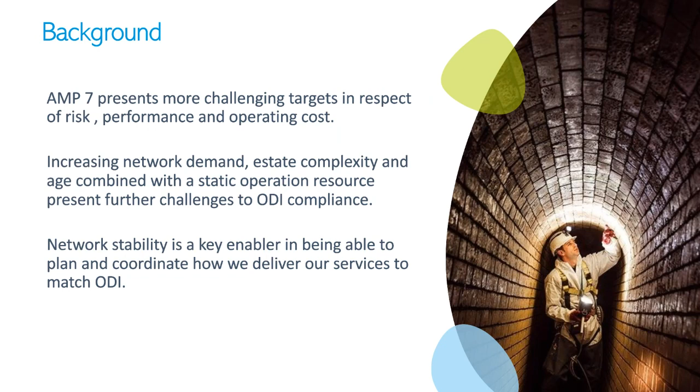They don't go anywhere. Our assets and our estate generally are aging. Our operational resource is static, and all of these present really big challenges. Network stability is a key enabler to allow us to be far more considered and planned in how we deliver our service to achieve some of the metrics that we need to. The more our business is in a stable state, the more planned activity we can do, and the less reactive we can do, the better.

So core challenges as well, the world has changed in the last 12 months. The COVID impact has hit the country, the world, very, very hard, but that has had a knock-on effect to our industry. The way I would describe it is, I think the industry responded really well. We won the war, if you like, but now we have to win the peace. Coupled with climate change, coupled with growth, population growth, all of those really big national and international challenges that we've got really do play a factor.

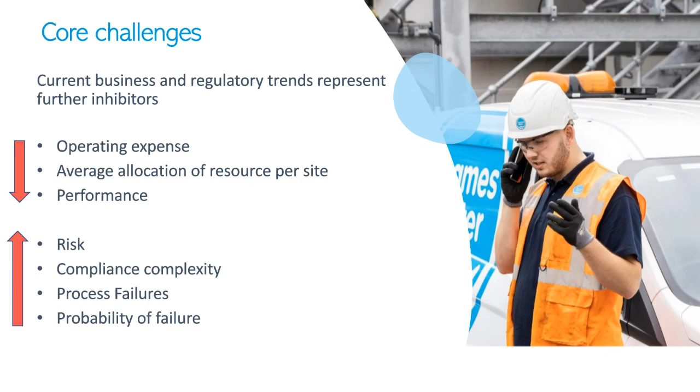On top of that, as I mentioned, we've got operating expense, we've got resource performance, the risk is only ever increasing with an aging asset base, the complexity around our compliance, and you put all that together, the probability of failure is going up. I came to Thames Water probably around 7 years ago.

I've been in the industry my entire career, and as well as the kind of scale and size of the physical asset base that we deal with, if you translate that into data, it's quite staggering, the kind of put some of the numbers up on the screen to kind of give you an idea of what we're dealing with.

So like I said, when we're talking about above ground, we mean pumping stations in this context, and below ground is our wastewater network. On above ground, we go through 2 million SCADA transactions a week. We've got over 5,000 pumping station locations, which incorporate 9,500 plus pumps.

We've got 15 million customers across our waste and clean asset base, 2,500 SAP work orders a week. These are big figures. You translate that into the below ground waste network, we're looking after not far off 110,000 kilometers of aging sewers. We've got 2.5 million manholes there or thereabouts.

In terms of weekly, we deal with around 1,400 blockages a week. We deal with 5,500 customer calls on average, and those calls inevitably turn into investigation jobs, and we go through around 3,500 investigation jobs a week that range from really serious pollution, flooding incidents through to more standard blockage incidents through to other investigations.

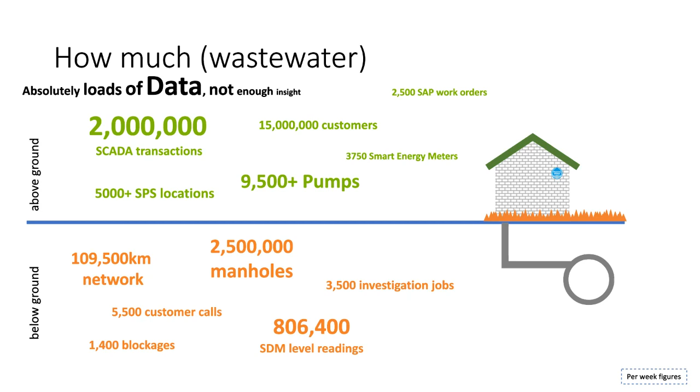There's some really big figures in there, and the kind of phrase that is commonly used is data rich, knowledge poor. So how did we go about approaching that?

Well, the key bit was to really gain data insight, but in a measured way. How could it be used on a practical level from an operational improvement point of view on a daily, weekly, monthly, annual basis, as well as the longer term tactical interventions and even strategic interventions from an AMP on AMP planning perspective? That was kind of really what we aspired to do.

How did we go about doing this? The tool that we use is called Icubed, off the information, insight and intervention kind of ethos that we've got.

It is really important to stress that when we talk about Icubed, it is an ethos. This is not a piece of software. We do use lots of different pieces of software: Azure, SQL Server, Esri, so on and so forth, all the applications that many colleagues in the industry use, but the difference here is that we take that information from all of these data sources, and we really gain the insight. We really understand what it's telling us, and that kind of quite grand statement on the screen around democratization and husbandry of data is a key enabler.

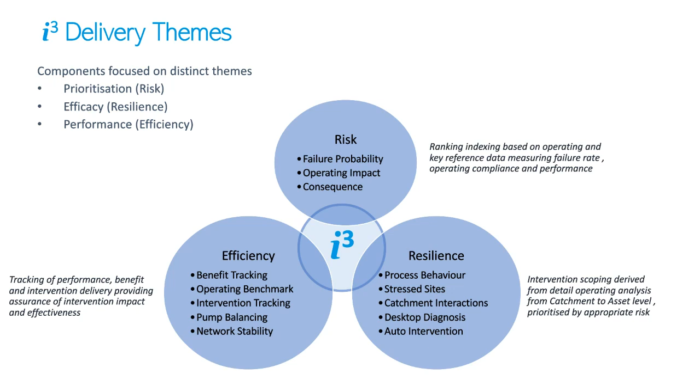So that's given, I hope, a quite high level understanding of what problem we are trying to solve. And I'll hand over now to Chris, who will talk in more detail around the below ground wastewater network part of Icubed, and then we'll move on to the above ground with Alan. Over to you, Chris.

Thanks, Anna. Good morning, everyone. My name is Chris Hinton and I'm the Asset Performance Insight Manager at Thames Water. I'm going to introduce you to the Icubed below ground model that we've developed.

Next slide, please, Anna. So the Thames Water operating area covers a wide area from London in the east to towns like Luton, Oxford and Swindon in the Thames Valley, and we maintain 109,000 kilometres of sewers across this operating area. As part of our drive to increase the volume and improve the efficiency of our maintenance of the network, we've developed the below ground Icubed risk model, which is a data-led sewer risk prioritisation model built in geographical information systems on the Esri ArcGIS platform.

GIS data from the company's corporate asset register has been combined with incident data such as sewer blockages, sewer flooding and pollutions, work management data like sewer cleaning and sewer repairs, and then localized risk factors like watercourses and local nature reserves to build an overall asset level risk prioritization model. Standardized risk scorings are used in the model to prioritize all sewers against each other, with additional asset and area characteristics used to assign relevant intervention types to different sewer failure modes.

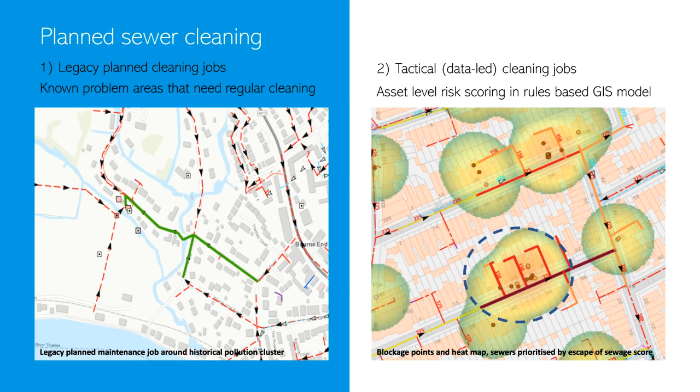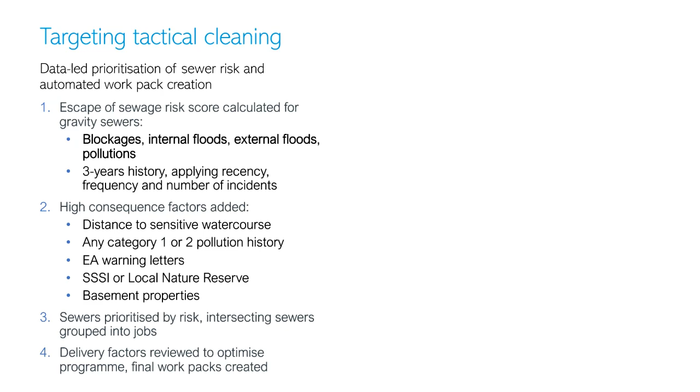I'm going to have a look now in a bit more detail at how these data-led rules work in the model and how we use them to target the tactical planned cleaning jobs. So the first step is to calculate a standardised escape of sewage score for every sewer asset in Thames Water. The escape of sewage score uses the last 3 years of sewer blockage, internal and external sewer flooding and pollution incidents, joins each incident to the nearby sewers, and then applies weighting for the recency, frequency and total number of incidents to calculate the overall escape of sewage score for each asset.

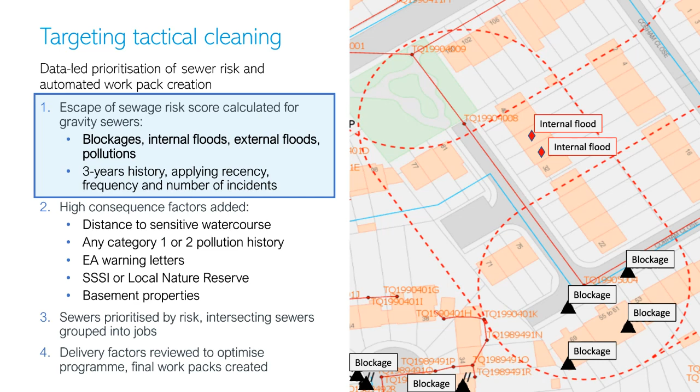Next, please. We then use high consequence data sets such as sensitive watercourses, serious pollution incidents and sites of special scientific interest and basement properties to increase the risk priority on assets that are related to those high consequence risks.

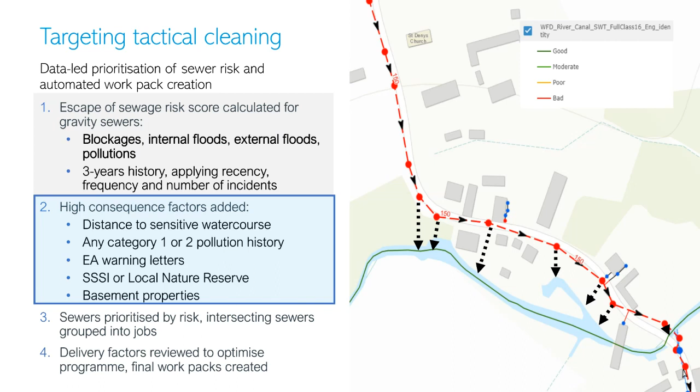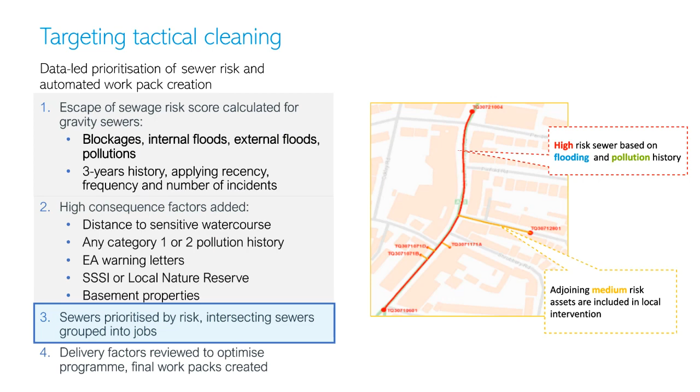Next, please. The final list of sewers that we've selected for tactical cleaning are then grouped into individual jobs based on connected sewers, and delivery factors such as permitting requirements and the traffic sensitivity are added to the jobs, which helps with our planning and delivery teams for the end-to-end joined up process.

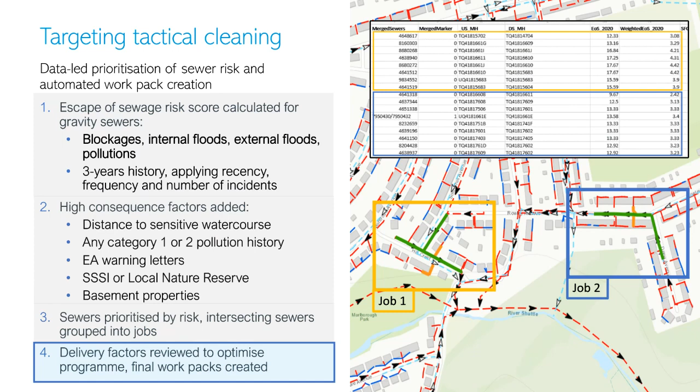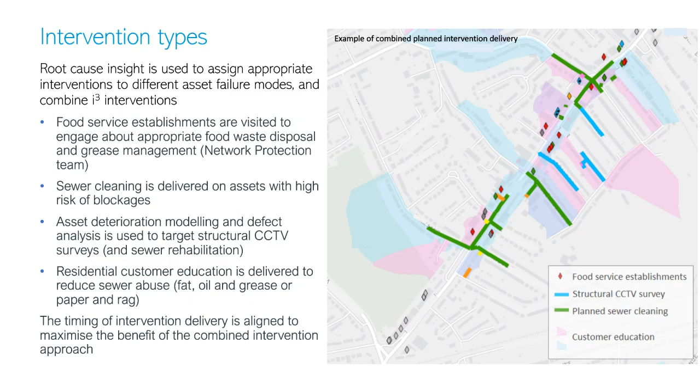Thanks for your time. I'll hand over to Alan now to introduce the above ground model.

Thank you, Chris. Morning, everyone. My name's Alan Jeffrey. I head up a team of analysts that support above ground assets within the operational side of Thames Water's waste network business.

A key principle we focus on is that alarm management is inherently reactive, whereas assessing behaviour change that results in alarms is predictive. This key behavioural insight is a core component of our Icubed tool. I'd like to show you some examples of how we exploit operational technology through the application of data science, some of our Icubed tools, namely behavioural heat mapping, performance benchmarking, and digital pump balancing.

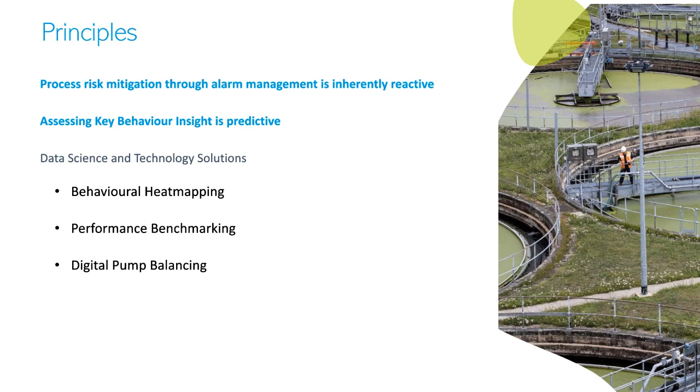Regular or live sampling can be used to build a profile of insight on stability and stress and risk. We can then check changes in behaviour under different scenarios against previous iterations with known outcomes. And this is our benchmarking.

Behavioural change relates to stability, i.e. the ability to sustain repeatable performance under various scenarios. Changes in stability can be data enriched to accentuate key factors such as risk, performance, efficiency, and effectiveness. Behavioural change is a lead indicator and an enabler to dynamic diagnosis, appropriate intervention, symptom closure, and benefit tracking.

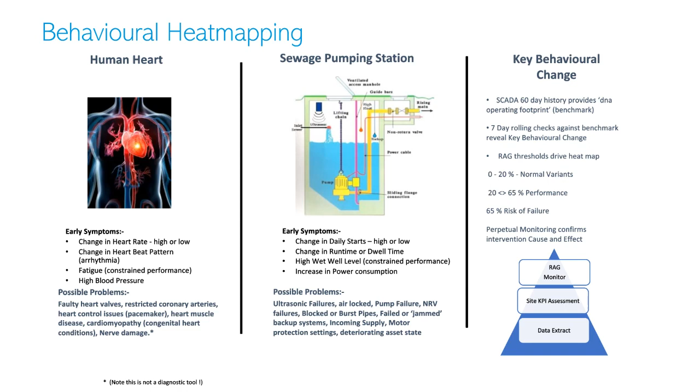In this simple example, we create a rolling 60-day behavioural footprint per site. This is its DNA, this is its benchmark. We then assess the last 7 days operation against the benchmark to reveal the key behavioural change. Basic RAG rules then apply to the results, where our immediate focus is on risk of failure, then performance opportunities.

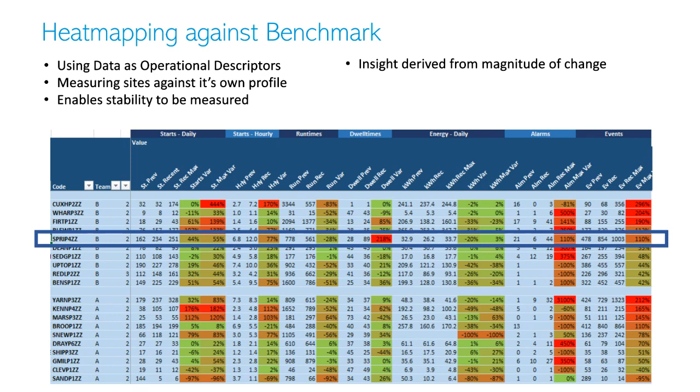Behind these statistics are the detail records. Multiple data streams collaborate to allow a logical and comprehensive view of the site operation per day, per asset, per data stream. Energy, pump starts per hour, per day, per asset. Alarm groups and event groups describe the operation of the day per dimension using the metadata. Heat mapping helps as a visual aid.

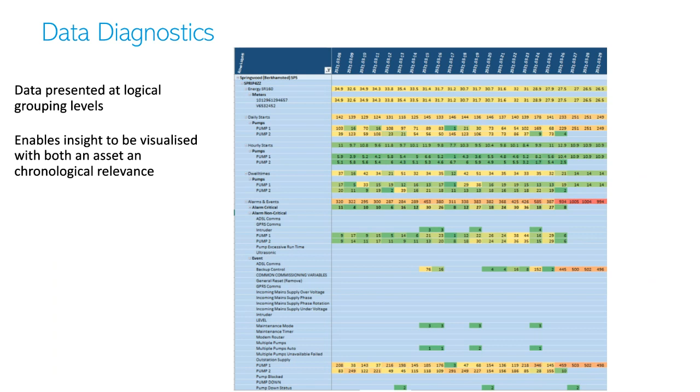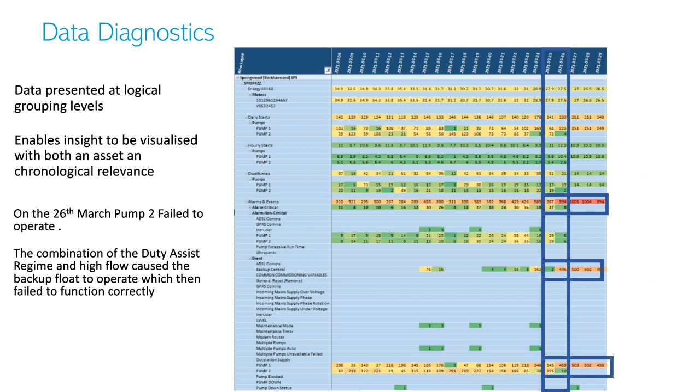Immediately, we can see this has occurred on the 26th of March, and note pump 2 fails to operate. Also note that the repeated backup operation happens at the same time, implying a defective backup control or an ineffective pump.

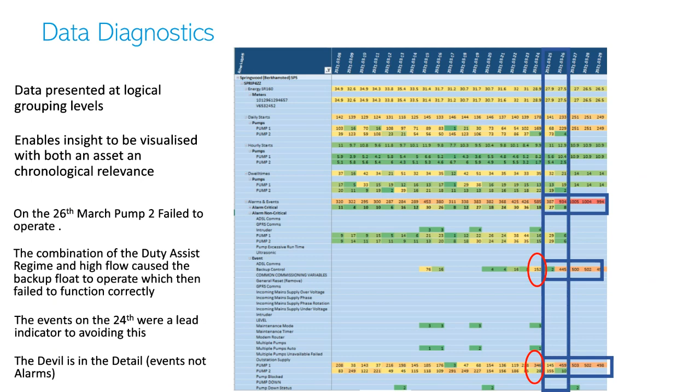Detail investigation reveals that insight was available nearly 3 days prior to this event. It's further confirmation that the intelligence is resident in the basic operational data, and alarm behaviour is consequential.

The same data can be used to validate pump performance. This is especially effective in pump sets or families, giving us what we call a sibling check, on the assumption that flow in a pumping station does not vary significantly in any given hour. Where a station operates at more than 24 starts a day, data can be used to calculate wet well cycle times and check the effectiveness of siblings performing the same task against each other.

This sample data shows a typical result set. You can see pump 1 is taking nearly twice as long as its sibling to perform exactly the same task. Pro rata these unit cost and basic consumption calculations, it shows that on a 10 kilowatt asset, continued imbalance, if left unchecked, would have cost an additional £700 a year.

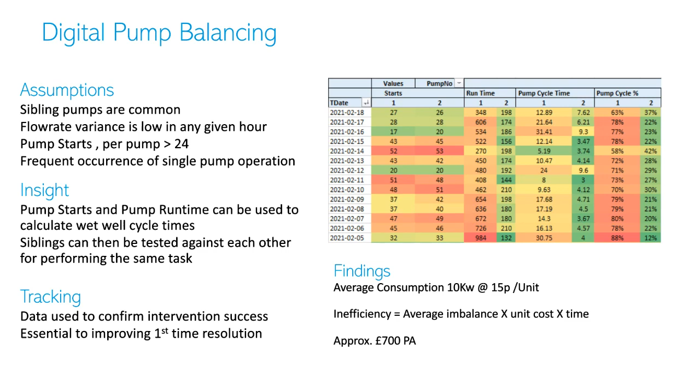Case studies I'd like to go through show these tools in operation. Here's an example of a low flow site. Stats reveal it usually operates less than 4 times a day and consumes about 1 kilowatt a day.

The heat mapping tool targeted this site for 3 key reasons: increase in starts from 3 to 37, increase in energy from 1 kilowatt to 38, and increase in events by 1,000%.

The wet well cycle profile shows that the site is in some form of anaphylactic shock, and alarms and wet well cycle profile suggest a backup control or NRV issue.

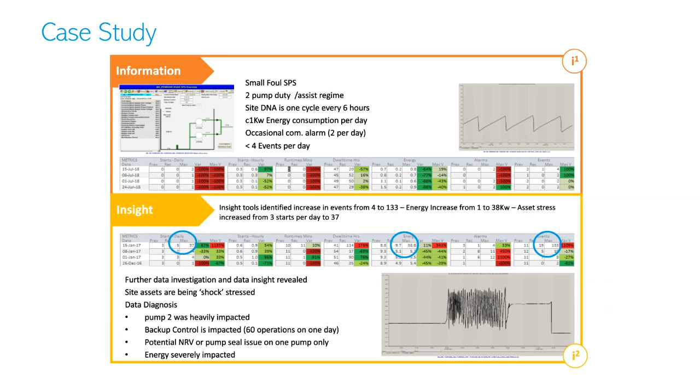Attendance on site revealed that the pump was not seated or sealed correctly. The backup control here is operated by electrodes, and spray from the failed seal initiated the backup system, which was restricted to operating as if it was in both a full and empty state.

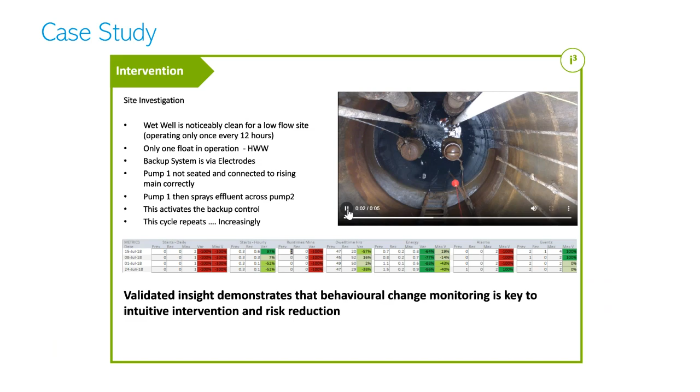Pump was reseated. Backup control checked for correct operation, but data is used to confirm successful intervention, as you can see at the lower part of the slide. Validation of symptom closure is a key part of the process.

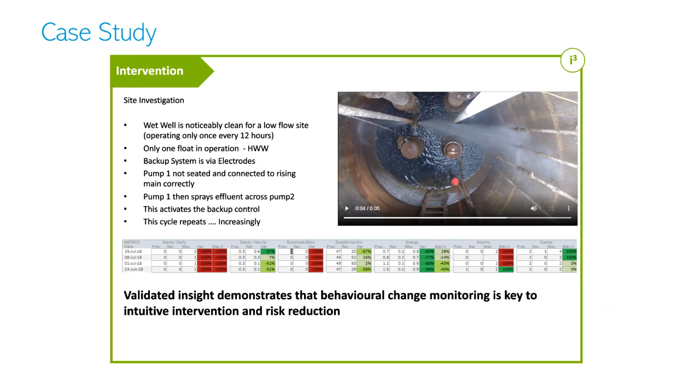Case study 2 shows a 2-pump station operating at a duty standby regime. Energy benchmarking and pump balancing identify pump 2 as having performance issues. This is clearly demonstrated in the runtime comparison of the symptom graph.

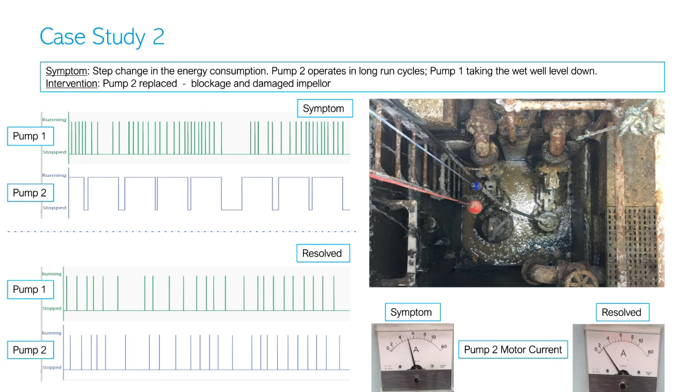Pump 2 was lifted, blockage cleared, damaged impeller replaced. The resolve graph demonstrates how load was balanced across the pump set, and the reduced motor running current confirms the closure of the symptom.

Tracking performance against each site's own benchmark and visualizing performance through heat maps are key tools. It brings about focus and enables performance to be quantified in OPEX terms, supporting our critical decision making and prioritization. This example would have cost an additional £1,200 a year if left undetected.

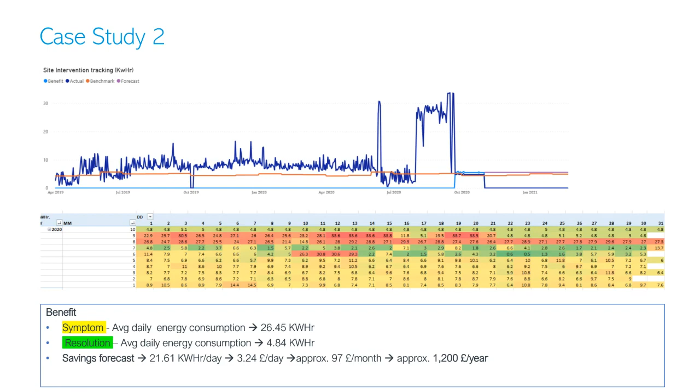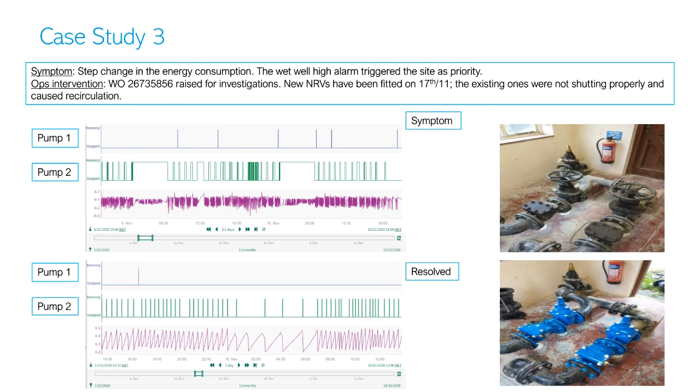The site triage identified non-return valves failing to operate correctly, and they were replaced. The resolve graphs demonstrate the symptom closure and the resultant stability of the operation of the site.

Symptom evaluation reveals an OPEX impact of just shy of £2,500 a year. It's another example of how tracking behavioural change against baseline on a site-by-site basis is a major contributor to predictive intervention.

Our current developments taking this further forward are around application of machine learning and artificial intelligence, and upscaling and developing the algorithms and models to apply this at a network, system or catchment level.